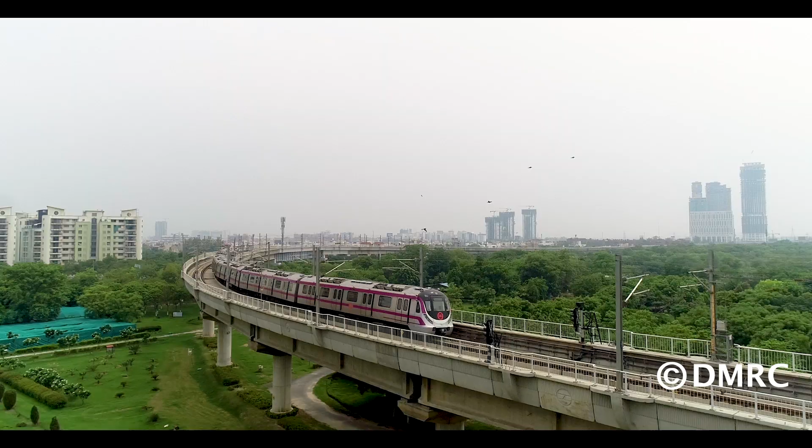Country's capital, nation's pride, its regal past, its cosmopolitan presence, world-class ways, pleasure and comfort, style and elegance. We know, we care. We are Delhi Metro.

Delhi Metro, which commenced operations in 2002, is regarded as one of the most successful urban transport systems in the world. DMRC has gained a reputation as an efficient metro system developer and operator, actively playing the role of consultant for many national and international metro projects.

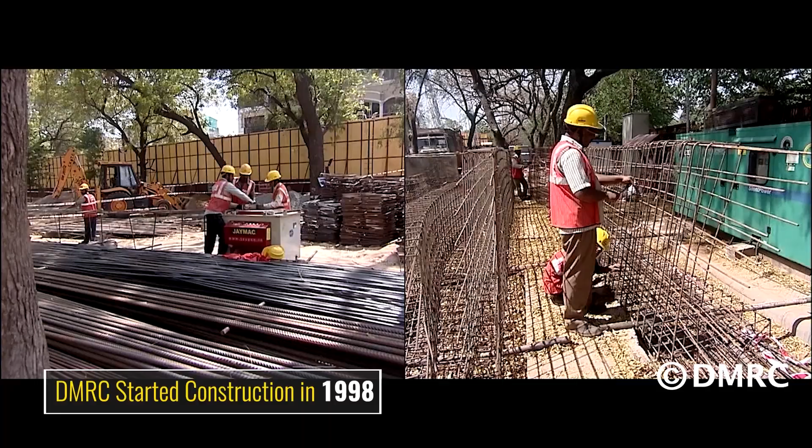Phase 1 and Phase 2 of Delhi Metro laid the foundation of a robust mass rapid transit system in the capital, connecting all four corners of the city and a large part of NCR. The Delhi Metro started construction in 1998, and the first elevated section, with one line running between Shahdara and Tis Hazari on the Red Line, opened in 2002.

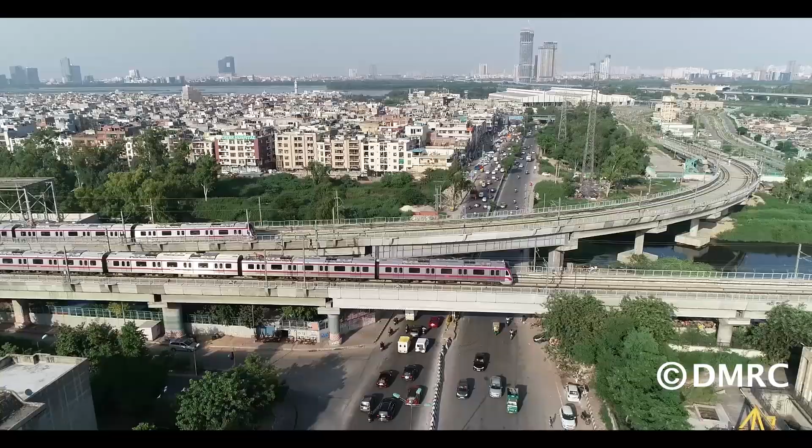Today it stands as the largest metro system in India, operating 12 lines covering 389 kilometers and 285 stations. This is a commendable achievement. Today, Phase 3 expansion has brought the Delhi Metro onto the world map and became an incredible tale of time, one which has been successful in providing quality services.

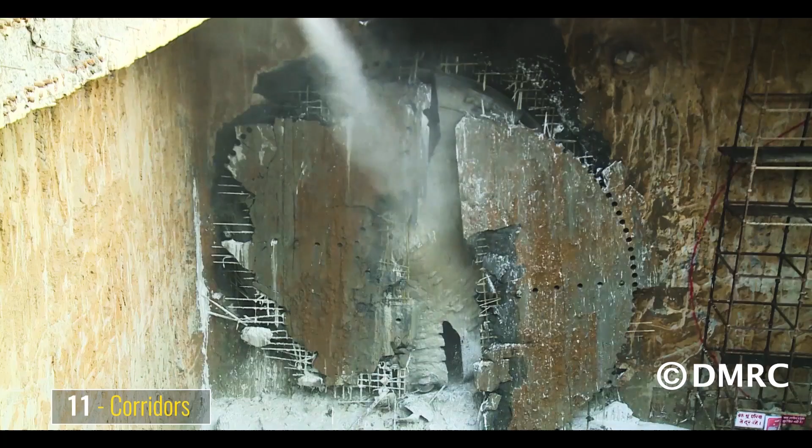Phase 3 connected the linear corridors of the earlier phases and made the metro accessible to most of the major localities of the city and NCR as a whole. It was the toughest phase so far in terms of engineering challenges, involving work on 11 different corridors with 30 mammoth tunnel boring machines and a workforce of nearly 30,000.

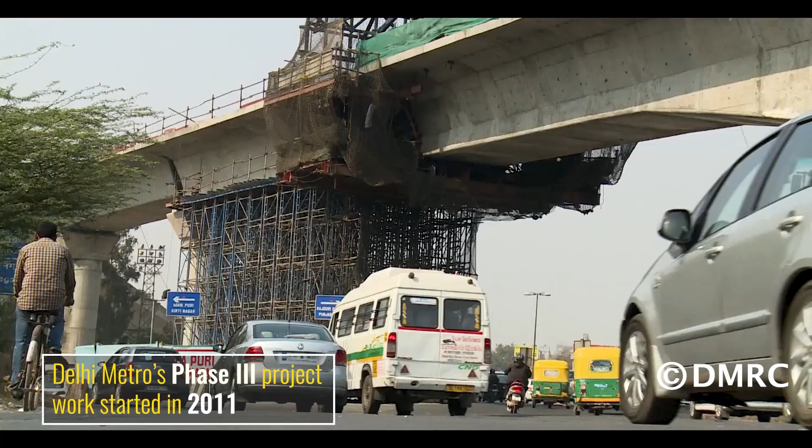Phase 3 was much different than Phase 1 and Phase 2. In terms of volume, the volume of Phase 3 was equal to Phase 1 and Phase 2 put together. Work on Delhi Metro's Phase 3 project started in 2011. It was one of the most challenging infrastructure development projects anywhere in the contemporary world.

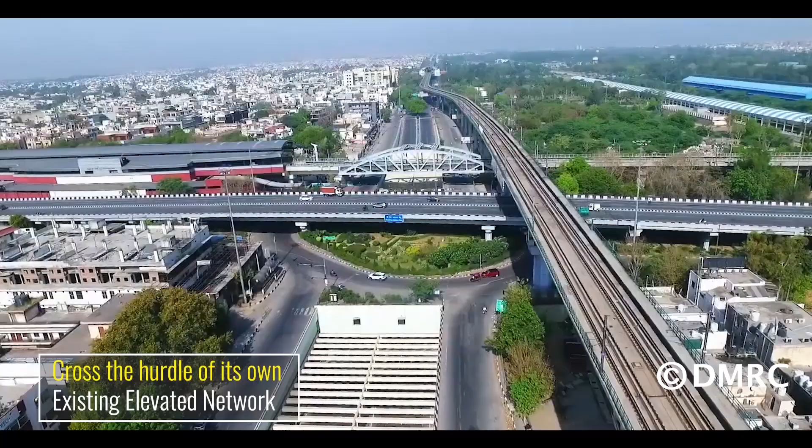For Phase 3, DMRC not only had to dig through rocky terrain, pass through thickly populated areas, and cross over flyovers, underpasses and railway tracks, but also cross the hurdle of its own existing elevated network. Major civil engineering challenges were faced on these three corridors.

The Violet Line, or Heritage Line, corridor of Phase 3 is an extension of Line 6 from Central Secretariat to Kashmiri Gate, with interchange facilities at Mandi House station for Line 3 and Kashmiri Gate station for Line 1 and Line 2. The Central Secretariat-Kashmiri Gate corridor was one of the first corridors of Phase 3, on which work began in May 2011, and it is an underground section.

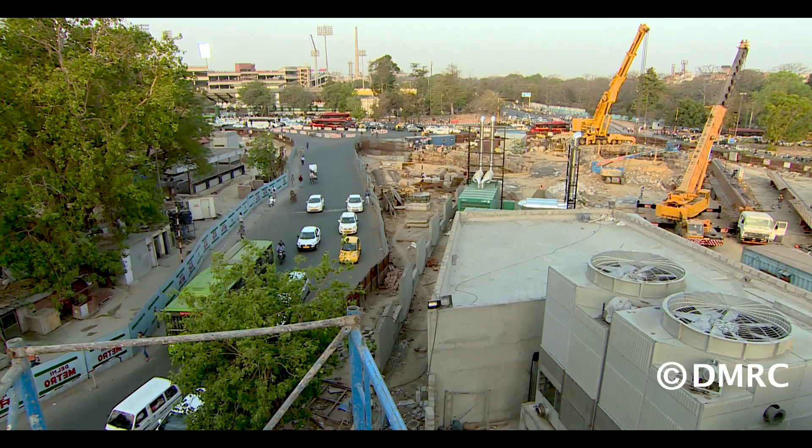As soon as construction work started on the Heritage Line, many complexities surfaced which tested the abilities of engineers. But the DMRC engineers were prepared to tackle them one after another.

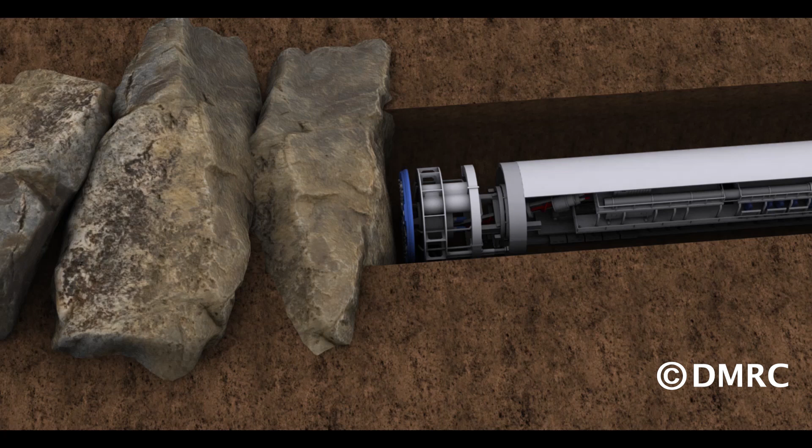The engineers encountered their first challenge on the ITO Delhi Gate section: the presence of the 16th century-old historical monument, Khooni Darwaza, constructed by Sher Shah Suri. The monument was in proximity of the construction area. Here, the TBM on the upline encountered hard rock, and it stopped, as the TBM was originally designed for soft soil.

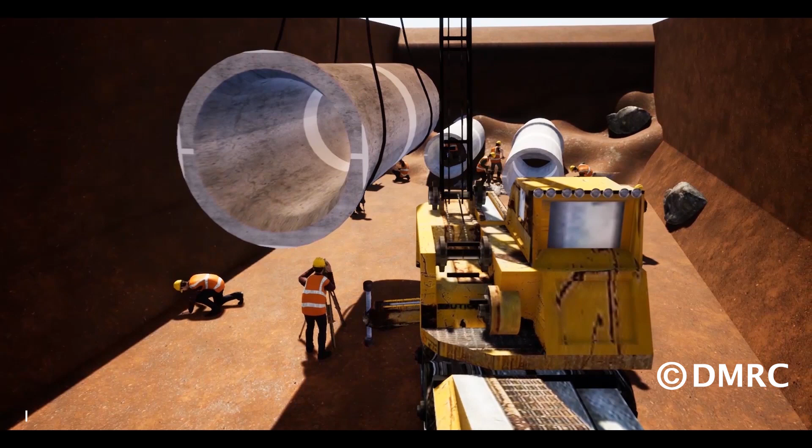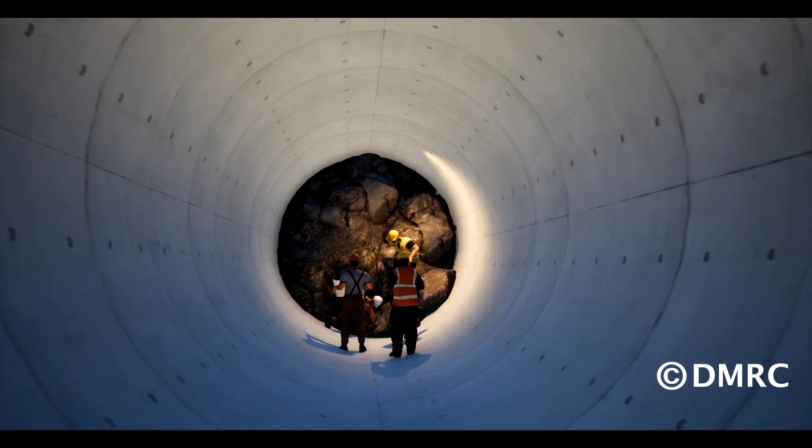DMRC then employed a pipe pushing technique. In this technique, two pipes of 1800 dia each were inserted from the Delhi Gate shaft towards the stuck TBM. A construction worker was sent through these pipes inside the tunnel to break away the rock slowly and make way for the TBM to move forward.

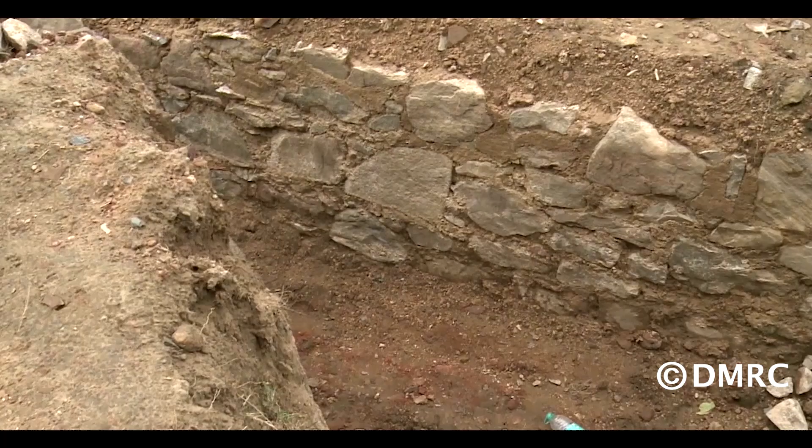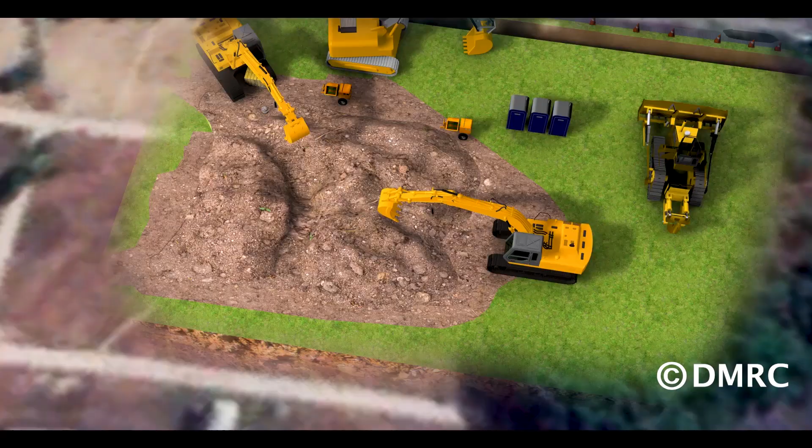Given the challenges it posed to DMRC engineers, the Delhi Gate-Jama Masjid section can be called the stretch of challenges. On the 6th of July 2012, while digging earth in the Netaji Subhash Park area to construct a metro station, DMRC came across remains of some medieval era construction buried under the ground. The discovery triggered excitement among local residents who believed the remains belonged to Akbarabadi Masjid.

DMRC decided to shift its alignment from that area. The Jama Masjid station was shifted 45 meters laterally and 75 meters longitudinally. The tunnel length was also laterally increased by 72 meters on both tunnels.

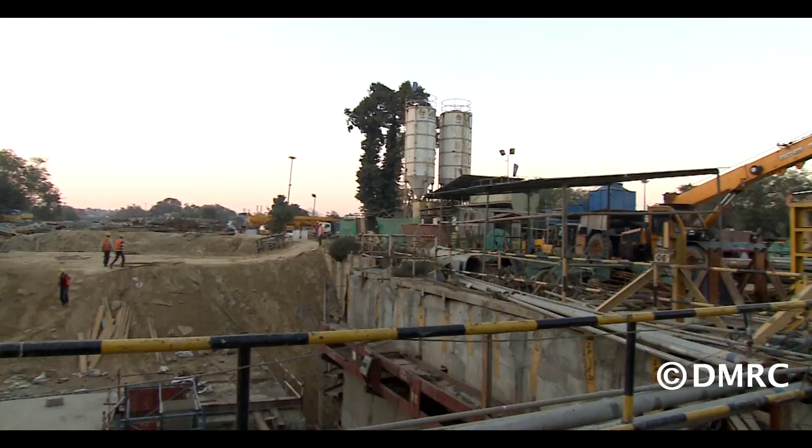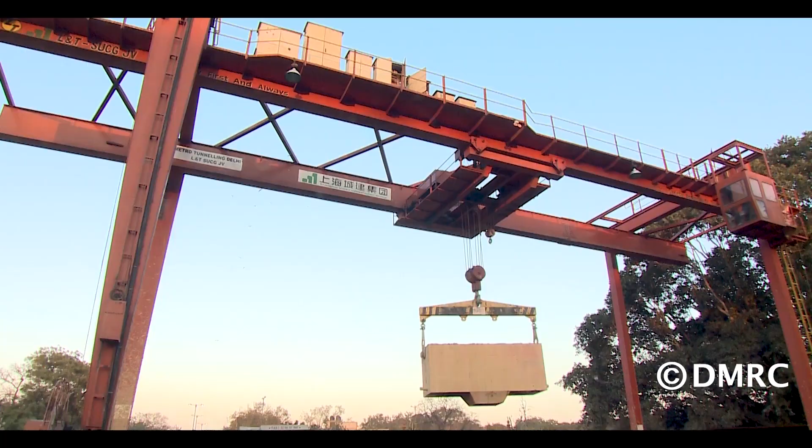Now DMRC had to fight another battle due to the change of alignment, which led to many changes at a very crucial time. The alignment now had to be shifted under the busy Netaji Subhash Marg, and a major portion of the tunnels were to be dug beneath the densely populated residential area of Daryaganj. Shifting the alignment caused numerous unwanted problems, as the earlier alignment was passing under a non-residential stretch of open space.

DMRC engineers did not have access to the ground because the area was densely populated and housed very old buildings and structures, mostly in dilapidated conditions.

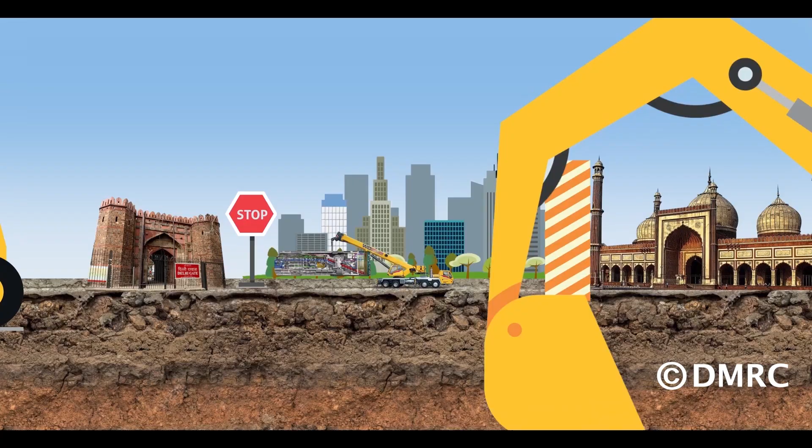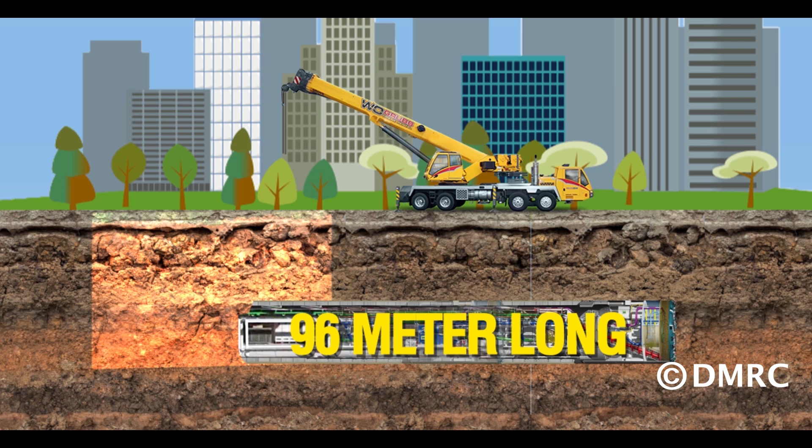In spite of having innumerable challenges, an extraordinary feat was achieved when the complete TBM assembly was done at one go inside the tunnel for the upline. It was a 96 meter long, completely assembled underground tunnel boring machine. This was the longest TBM ever used in a Delhi Metro project, and it weighed approximately 500 tons.

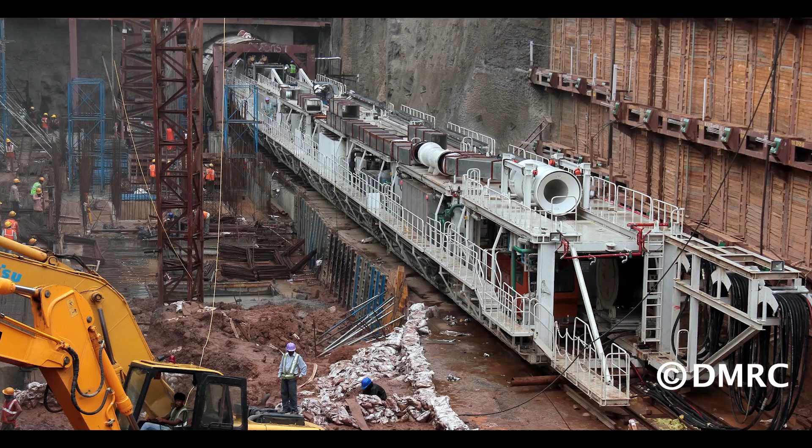The first tunneling obstacle of Phase 3 was also witnessed with this TBM. It initially encountered hard rock, but after 35 rings had been completed, the TBM encountered an old well adjacent to Kasturba Gandhi Hospital in October 2013.

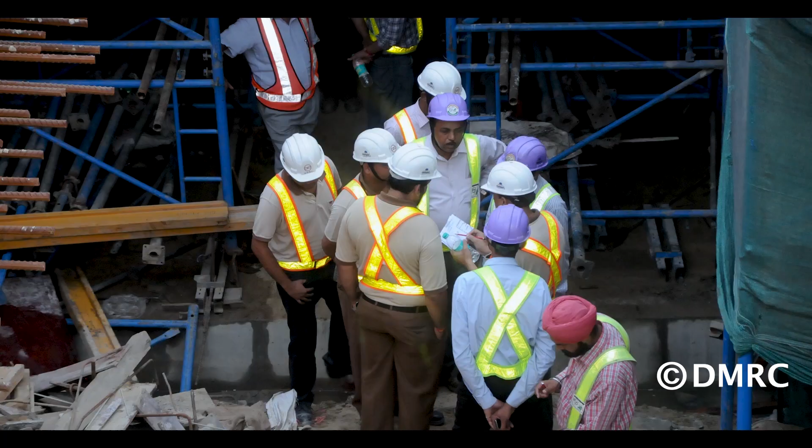This sudden change in ground parameters and settlement values led to a chimney-like formation, resulting in a 172 cubic meter cavity from the ground level. DMRC engineers acted quickly, and this issue was resolved within 24 hours. But after crossing the hospital, the TBM stopped as its bearings failed.

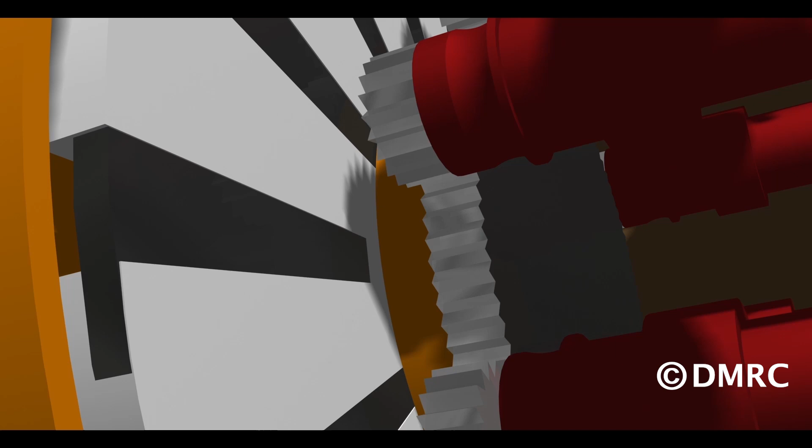Once a TBM gets stuck in such a scenario, it is extremely difficult to move it. The only way to retrieve it is to make a shaft after thoroughly studying the surface.

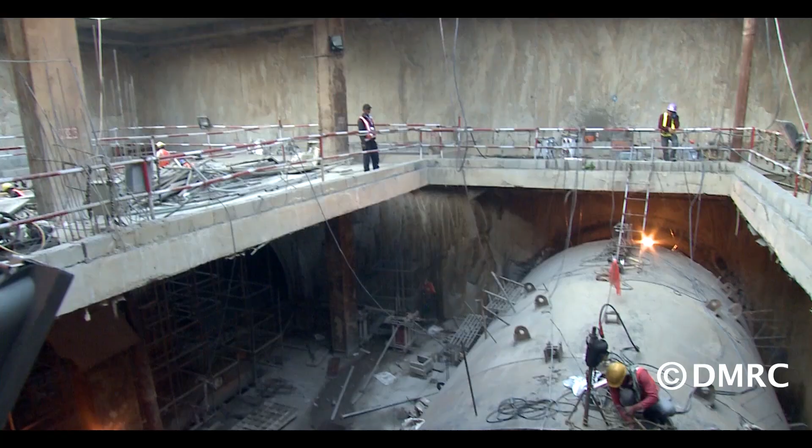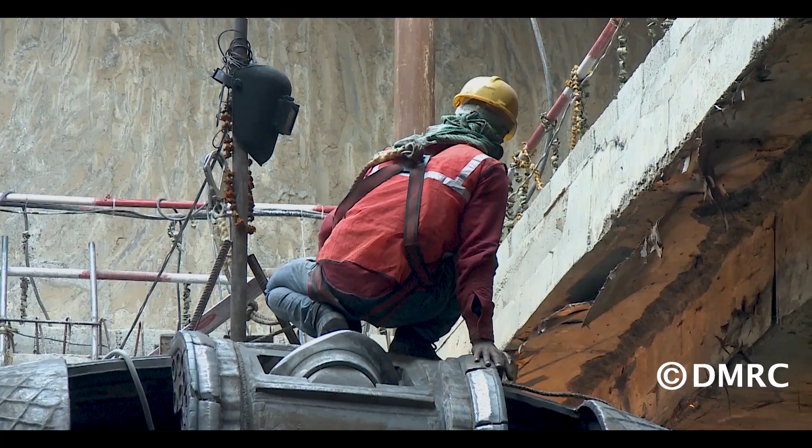During the construction work, every TBM was given a number, and everyone would recognize the TBM by its number only. The TBM-3 remained stuck at this point for almost 2 years, and it could complete around 50% of the tunnel. The cutter head of the TBM was badly damaged due to the rock encountered on the way.

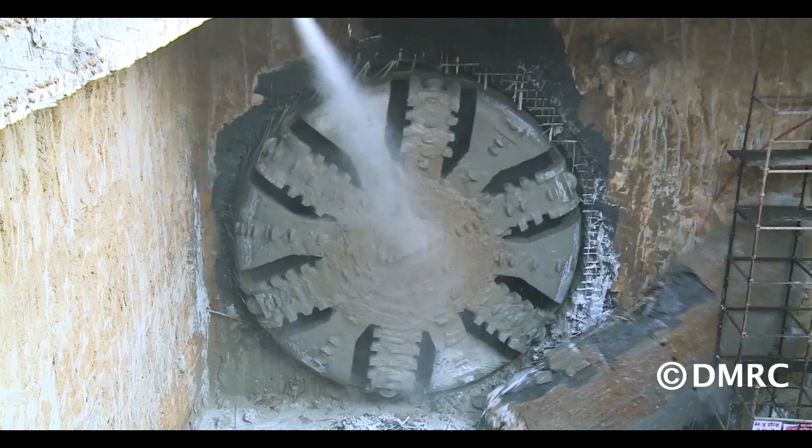Originally, only one TBM was to be used for constructing both the tunnels. But finally, a total of 3 TBMs had to be used to complete the tunneling between Delhi Gate and Jama Masjid. During the construction of the Heritage Line, evacuation of local residents of Daryaganj was a Herculean task.

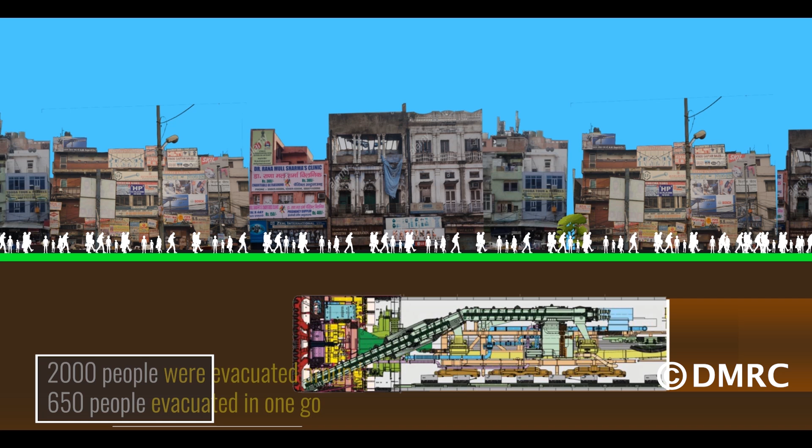The old Daryaganj area houses a number of dilapidated buildings and structures. People had to be evacuated from these buildings in a phased manner as a precautionary measure, twice during the tunneling on both the tunnels. A total of 2,000 people were evacuated, with around 650 people evacuated in one go.

They were accommodated in various guest houses situated in the nearby areas, and DMRC paid for their lodging and food expenses. DMRC also repaired and restored their houses before shifting the residents back.

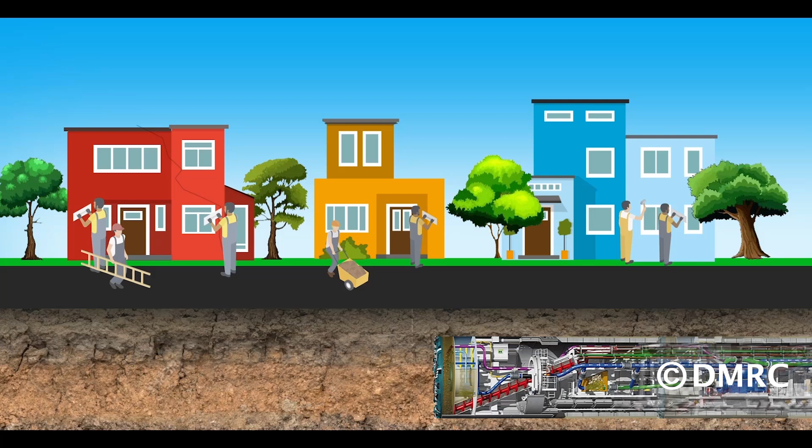The Kashmiri Gate Metro Station, with 3 interchanges, is one of the biggest interchange stations of the Delhi Metro network. The station is the first model of multimodal integration in Delhi. This giant station is very close to ISBT, having interstate and DTC bus stands and metro stations connecting almost every part of the city.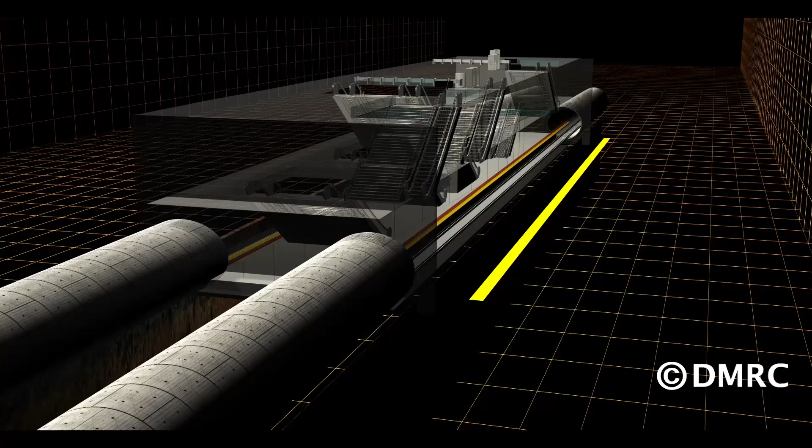The initial plan for the new station was overlapping on the existing station, and it was thus decided to shift the alignment so that the existing station would not be disturbed. The new station had to be curved at the platform level. The radius of the curve is 1000 meters, and due to this, the downline is curved while the upline is straight. Because of the same reason, the platform of the new station is also tapered.

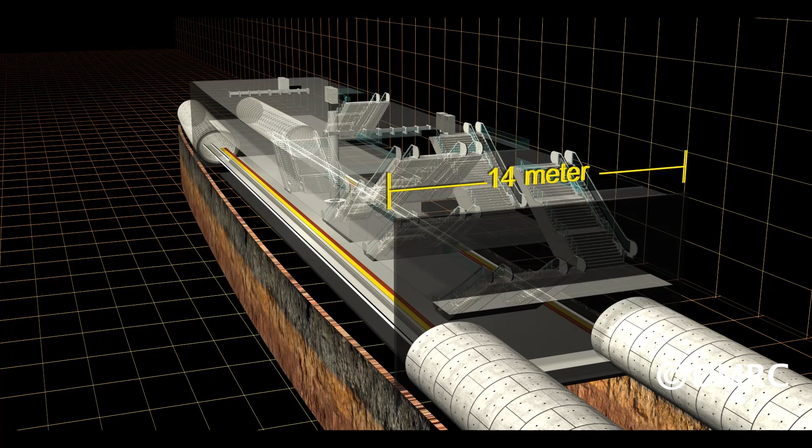The width of the platform at the south end, that is the Lal Killa side, is 14 meters, and it narrows down at the north end to 8.5 meters. Despite having the maximum number of challenges on this smallest stretch of Phase 3, DMRC succeeded and somehow managed to beat the odds, and the ITO Kashmiri Gate Heritage Line was thrown open to public on the 28th of May 2017.

Delhi needs more metro services considering the fact that most of the population rely on metro. The Janakpuri West Botanical Garden Corridor, color-coded magenta, is the Delhi Metro's new corridor along the city's outer ring road. This 38.23 km long corridor is extremely crucial from the point of view of connectivity.

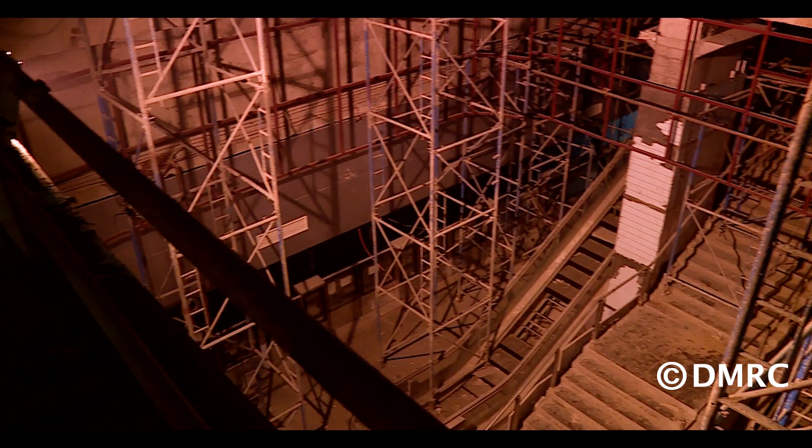DMRC has achieved numerous milestones while constructing its Phase 3 project. During the construction of the Hauz Khas metro station, the Delhi Metro turned one of the major obstructions into an engineering wonder by creating a network of criss-cross underground tunnels, as Hauz Khas was going to have an interchange facility.

The new tunnel had to pass below an already functional metro tunnel, and all this had to be achieved without hampering passenger services even for an hour on the Yellow Line. The Yellow Line station at Hauz Khas is 17 meters deep.

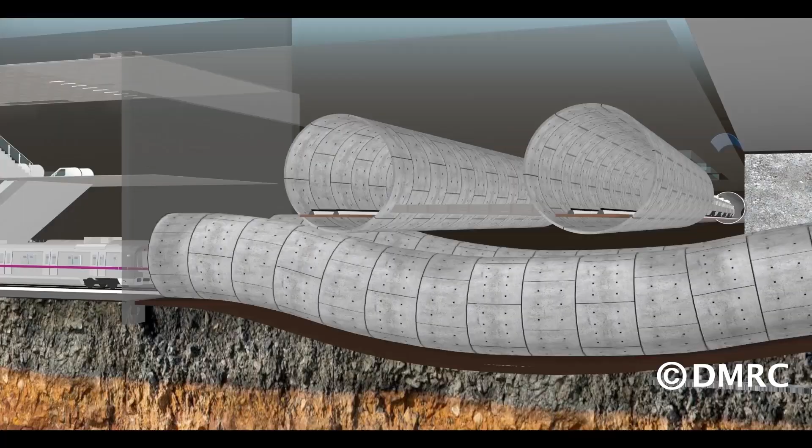For the construction of the new station, it was not possible to go below the existing station, as its foundation is 32 meters deep, and there is the foundation of the flyover on Outer Ring Road as well. So, the new station has been built adjacent to the existing station at a depth of 29 meters with a length of 265 meters. It has been designed as a 4-level station: rail, platform, intermediate, concourse.

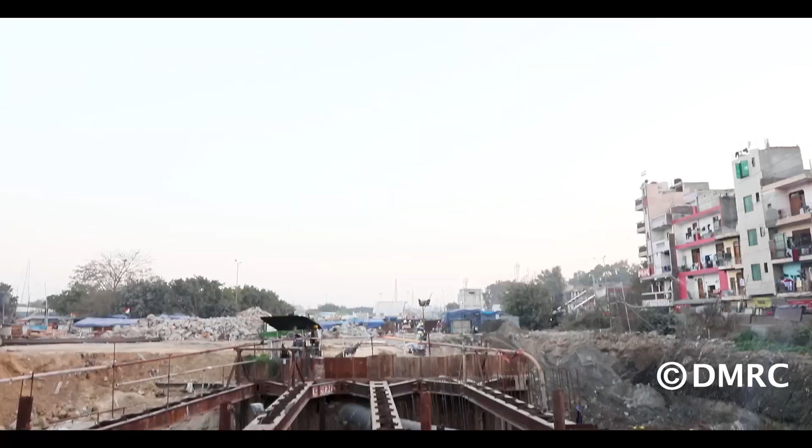Hauz Khas interchange station in many ways reflects the tremendous construction challenges that DMRC's engineers have faced in carrying out the underground construction work of Phase 3. Underground construction is always having its challenges.

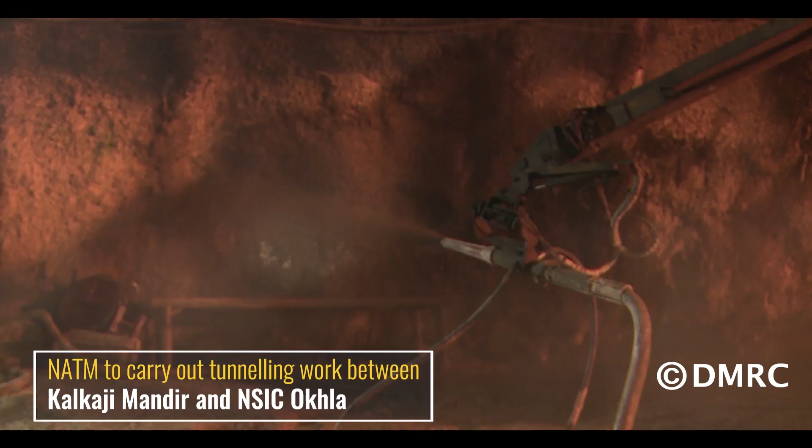DMRC has used the New Austrian Tunnelling Method, NATM, to carry out tunnelling work between Kalkaji Mandir and NSIC Okhla on this corridor to pass below the Nehru Place Kalkaji elevated section of the Violet Line. The tunnel between Kalkaji Mandir and NSIC Okhla passes below piers 135 and 136 of the Violet Line.

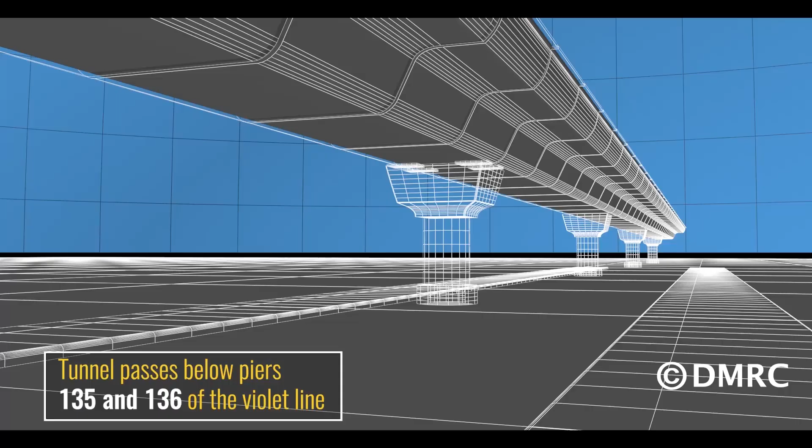It would have been impossible to construct twin tunnels within such a short space. Therefore, a decision was taken to construct a single tube twin tunnel through which both the tracks could pass, using the NATM technology.

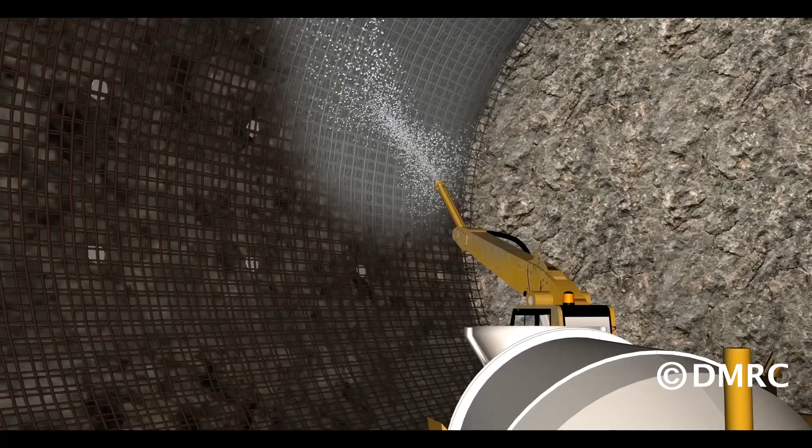NATM technology involves tunneling through mechanical excavation or controlled blasting. In this method, initially the earth is excavated and a primary lining of shotcrete, steel lattice girders, wire mesh and rock bolts are applied for stabilization of soil as per the geological strata.

Delhi Metro's use of the NATM technology at Kalkaji Mandir is a classic example of intelligent tunneling by the Delhi Metro's engineers.

One of the great benefits of Delhi Metro's Phase 3 is that the domestic terminals of the Indira Gandhi Airport are also connected by metro. The Terminal 1 Indira Gandhi International Airport metro station is an underground station which has come up on the Janakpuri West Kalindi Kunj Botanical Garden corridor.

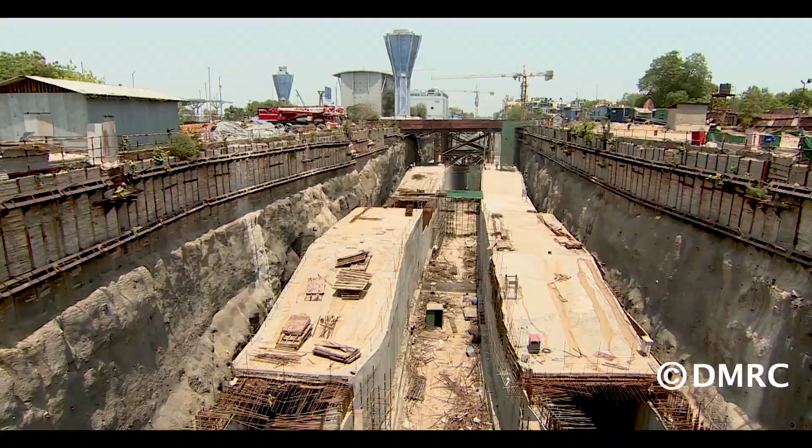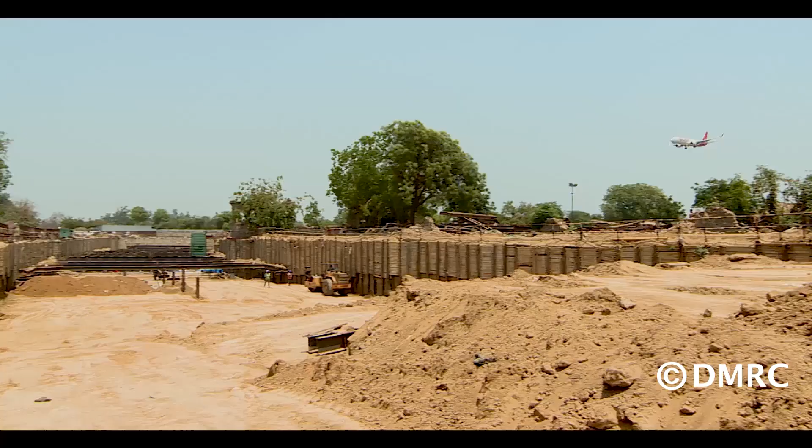DMRC's engineers encountered hard rock during the excavation for this station. However, on one side of the site was the busy Terminal 1 of the IGI airport, and on the other was the congested Mehram Nagar locality, which had a number of buildings in precarious condition. Controlled blasting was carried out at the site, and various monitoring equipment were installed to check the condition of the nearby buildings. The operations or traffic flow at the nearby airport terminal was not allowed to be hampered even for a day.

The Terminal 1 IGI Airport Station also stands out for its engineering achievements. It has a number of landmarks, making it one of the most unique stations of Metro's third phase of expansion. The station box is among the longest with a length of 312.2 meters.

A bridge built on the river Yamuna by DMRC with a span of 574 meters, which connects Delhi with Noida, is one of its kind. During construction work, on many occasions, water was released from the barrage at very short notice, leaving DMRC with very little time to wrap up work there. Within hours, all workers and heavy equipment had to be removed from the site as water would start rising following the release from the barrage. This caused substantial loss of man-hours.

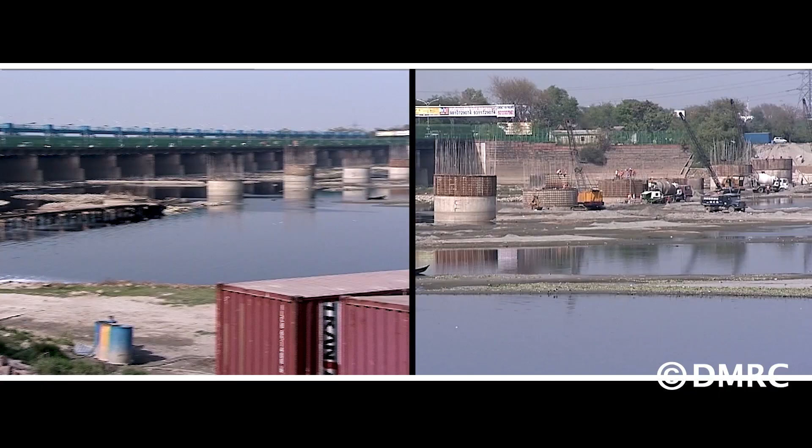During monsoons, due to rising water levels, it was very difficult to carry on with the construction, and substantial work could be done only during the dry months.

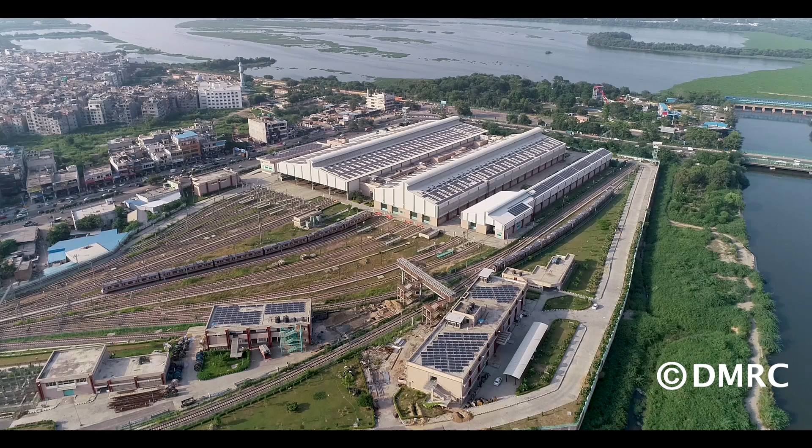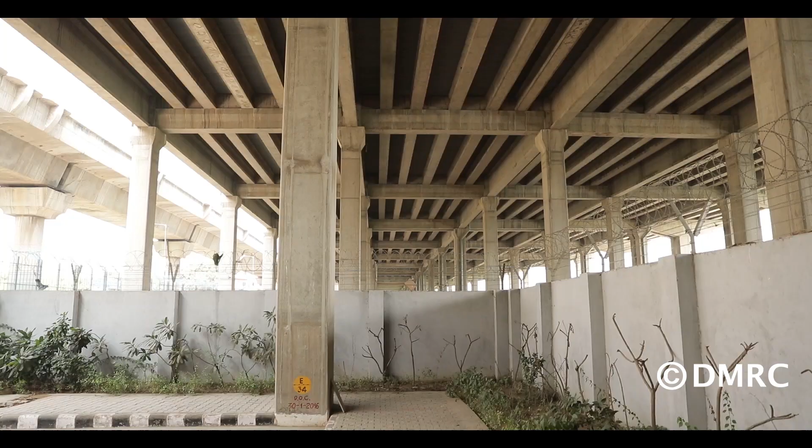For Kalindi Kunj Depot, about 22.5 hectares of land was requisitioned for the construction of the depot, out of which only 50% was available. A 1.3 kilometer long and 30 to 40 meters wide deck for stabling lines has been constructed at Jasola Vihar near Kalindi Kunj on an elevated deck about 13 to 14 meters from the ground, where the trains operating on this section are stabled.

The Pink Line, that is Line 7, was constructed as part of the Delhi Metro Phase 3 network. It consists of 38 metro stations from Majlis Park to Shiv Vihar, out of which 12 stations are underground and 26 stations are elevated. The Pink Line, with a length of 59 kilometers, is the longest individual line in Delhi Metro.

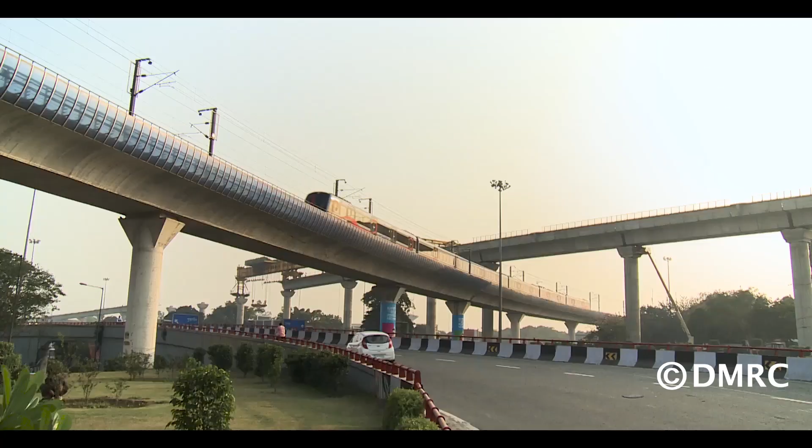DMRC reached its highest point so far at 23.6 meters. It crosses over the existing alignment of the Airport Express line at Dhaula Kuan. The design team of DMRC also prepared the design of the viaduct after closely studying the requirement of passing over several major landmarks such as the Airport Line Viaduct and the flyover at such a height.

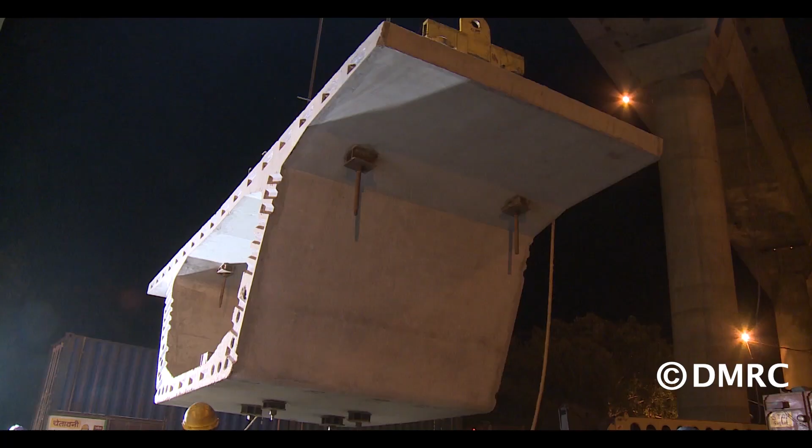Due to the proximity with the existing flyover and the Airport Line Viaduct, and as the segments were to be lifted to a height of about 23 meters, a systematic methodology was planned for the erection of the segments. The segments were erected through a special 4-step method because of the extra height involved.

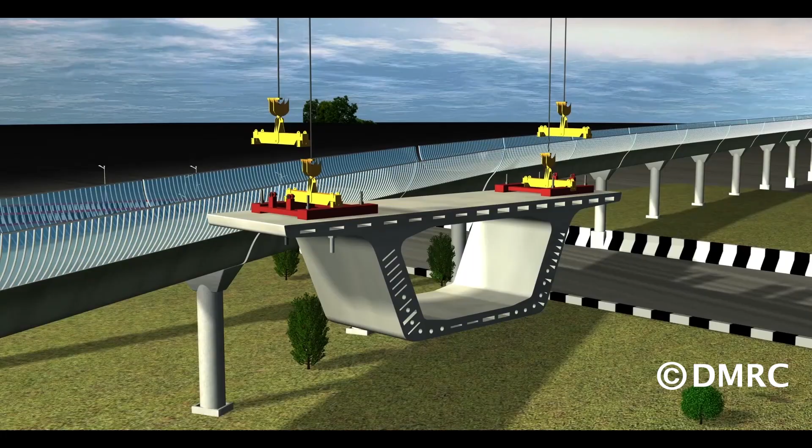Step 1: The trailer brought the segment and was parked between the already constructed piers. Step 2: The segment was lifted by an extended winch assembly having a load carrying capacity of 120 tons. Then the segment was transferred to a normal winch assembly and the extended Macalloy bar was removed and again lifted to a height so that it could be transferred to the Macalloy bars fixed to the slider.

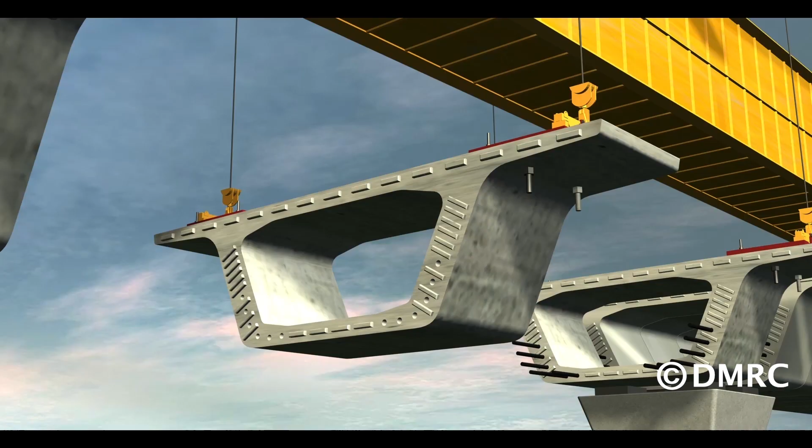Step 3: The segment was rotated and attached with a segment trolley or slider. Step 4: The segment trolley or slider was pushed to one end of the pier, where it was erected through a segment launcher.

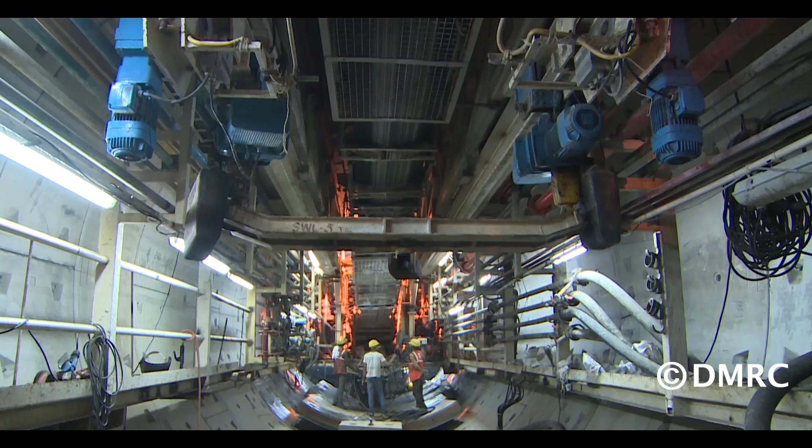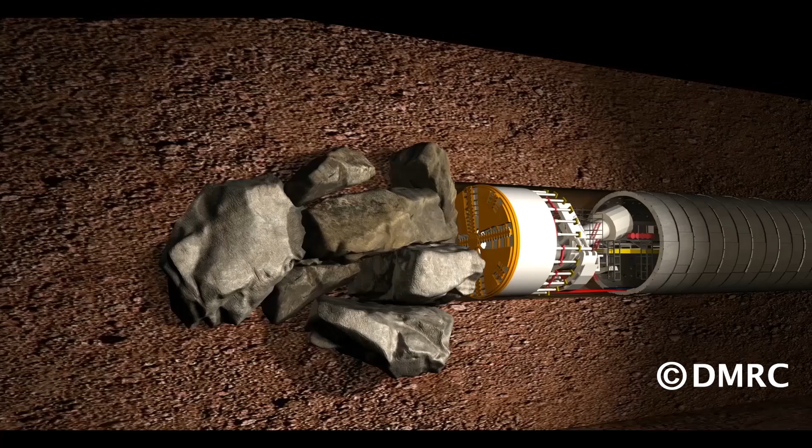Majlis Park is the first station of the Pink Corridor. The tunnelling between Majlis Park and Azadpur was quite challenging. After completing 580 rings from Azadpur towards the Majlis Park ramp, at a depth of 21 meters at their low point, tunnel boring machines or TBMs engaged to make the 1.4 kilometer long tunnel encountered unexpected ground conditions while tunnelling in this stretch. The unexpected ground conditions damaged the cutter heads of both the TBMs.

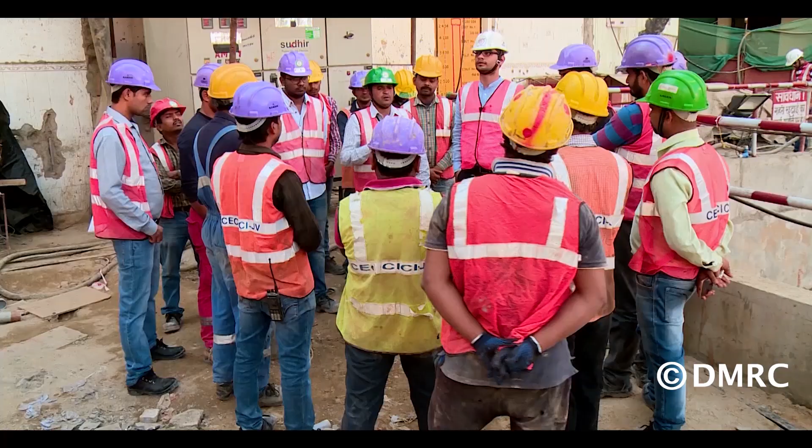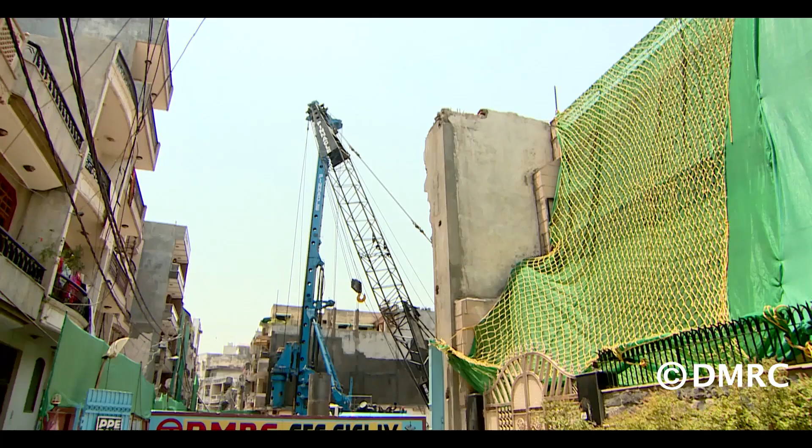Thus, an emergency shaft had to be made midway to retrieve the TBMs in the densely populated colony of North Delhi. Land on the surface to build the shaft was not available, as this area had a number of private residents and a Gurudwara. Under these circumstances, DMRC took a decision to retrieve the TBMs instead of changing the cutter heads, and for this purpose, 2 houses of 110 square meter area each and another structure of 400 square meters were taken to make the retrieval shaft.

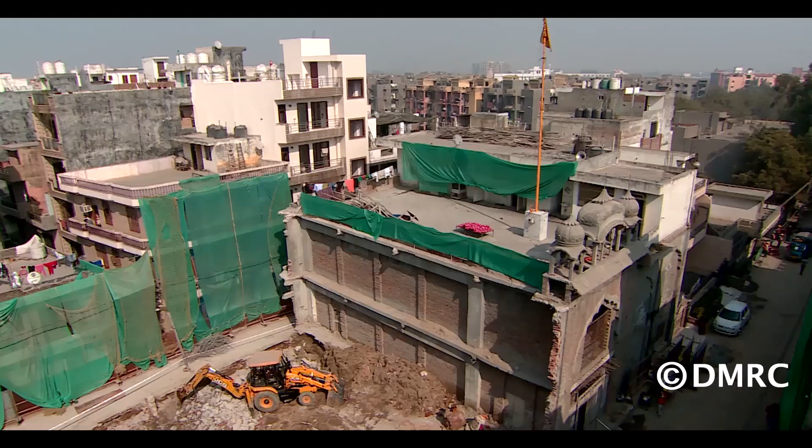Once the residents were relocated to an alternate location and the land was acquired from the concerned owners, the demolition work began. The rescue shaft was designed. During the boring of piles, surrounding buildings were closely monitored by soil settlement markers.

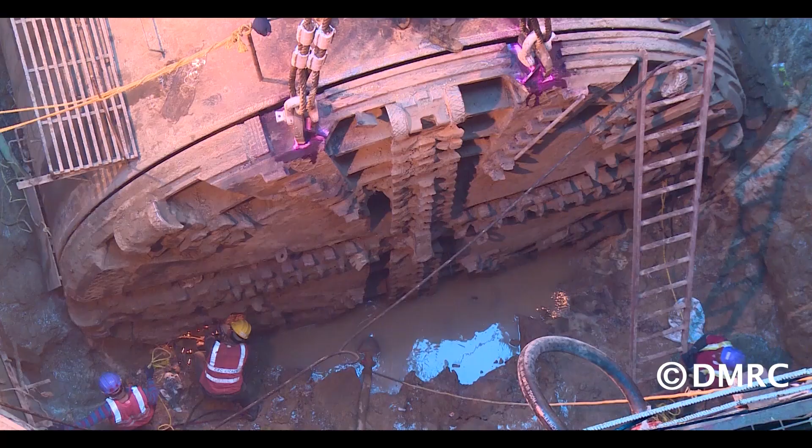Meanwhile, 2 rock TBMs were started from the Majlis Park side towards Azadpur, so that the tunnelling process could be completed in this section. After completing the tunnelling process, these TBMs were also retrieved from the same shaft at Rameshwar Nagar.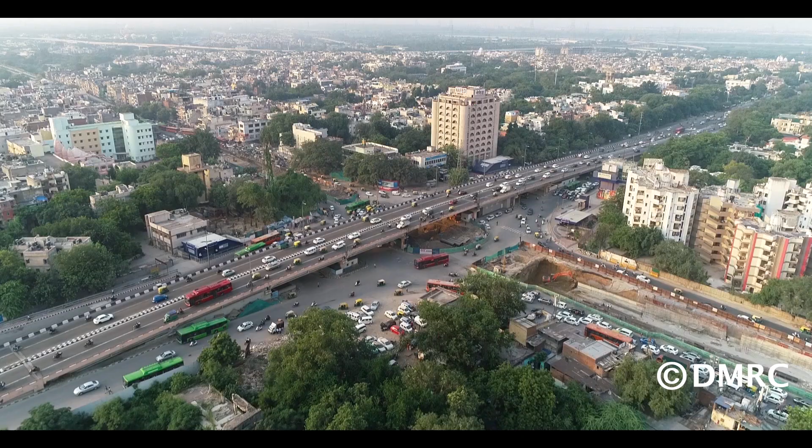Ashram station is one of the smallest metro stations in the world. Located at the center of one of the busiest intersections in the city, DMRC had to fight several land acquisition battles. The long-lasting legal battle forced designers to come up with a station design that took just 151.6 meters of space against the average of 265 meters. Since private land could not be acquired, DMRC had to reduce the station space by almost half the average size.

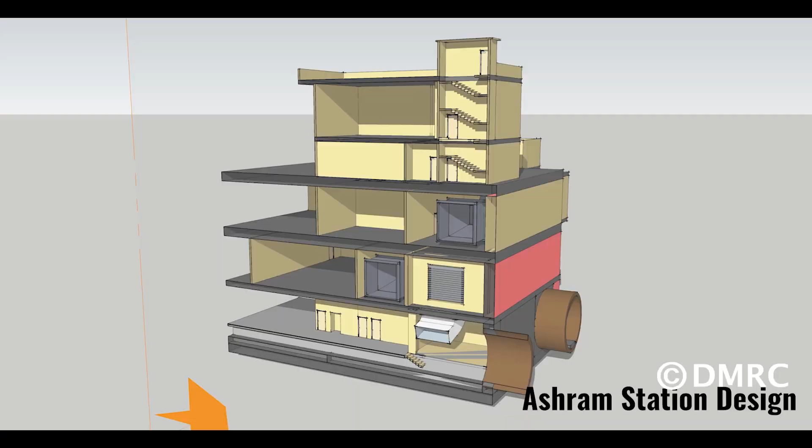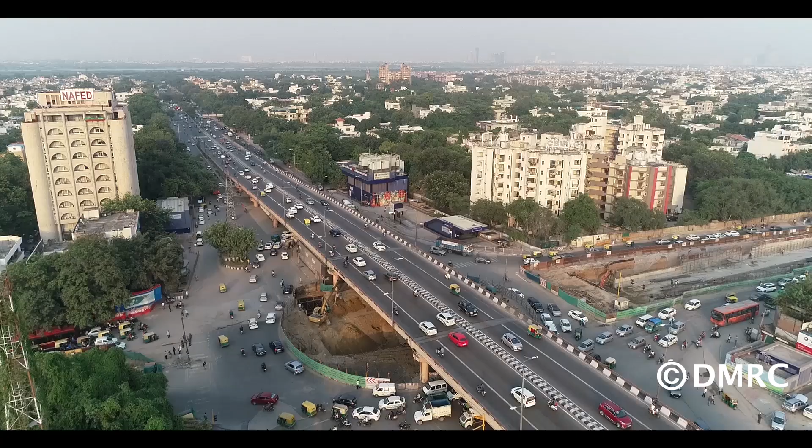DMRC architects and engineers, for the first time, completely redesigned the underground station, utilizing all three levels - the mezzanine, concourse and platform. This was done by reducing the length of the platform and shifting ancillary buildings and ventilation fan rooms vertically upwards.

The Line 7 of Delhi Metro has faced the maximum number of engineering challenges since it passed through a lot of difficult stretches and densely populated areas. One such section was where the viaduct had to cross the Anand Vihar railway station of the Indian Railways. For crossing this area, 6 piers were erected in the railway compound in such a way that there was no infringement of the metro line with the railways. One of the spans, designed between pier number 235 and 236, is almost 70 meters long. In order to cater to the requirement of special spans, balanced cantilever construction has been done with the help of form travellers.

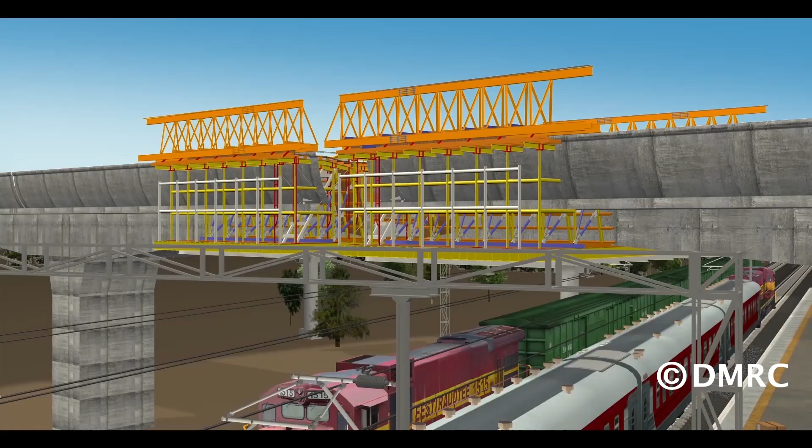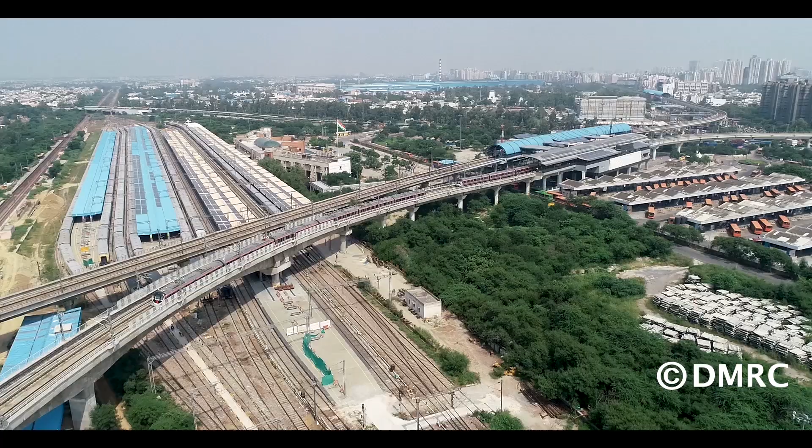DMRC has crossed the railway lines in a very safe and systematic manner, with all safety precautions in place and without affecting the daily train movement on the section, in coordination with the Indian Railways.

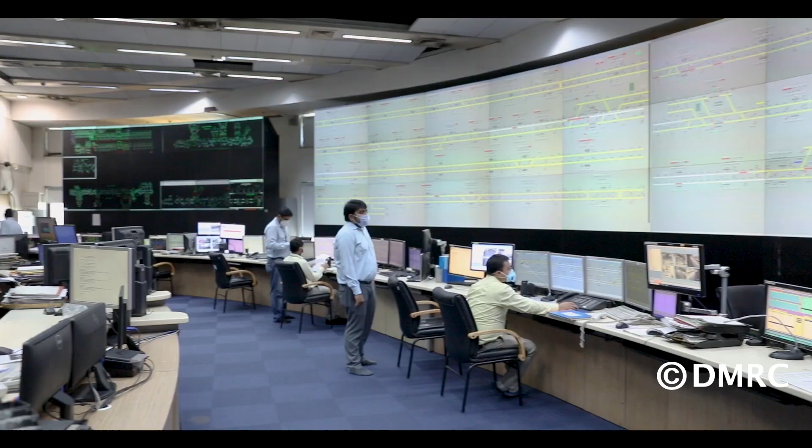The new signalling technology known as Communication-Based Train Control or CBTC has been implemented on this corridor after undergoing rigorous testing in stages. By means of the CBTC systems, the exact position of a train is known more accurately than with traditional signalling systems, resulting in a more efficient and safe way to manage railway traffic.

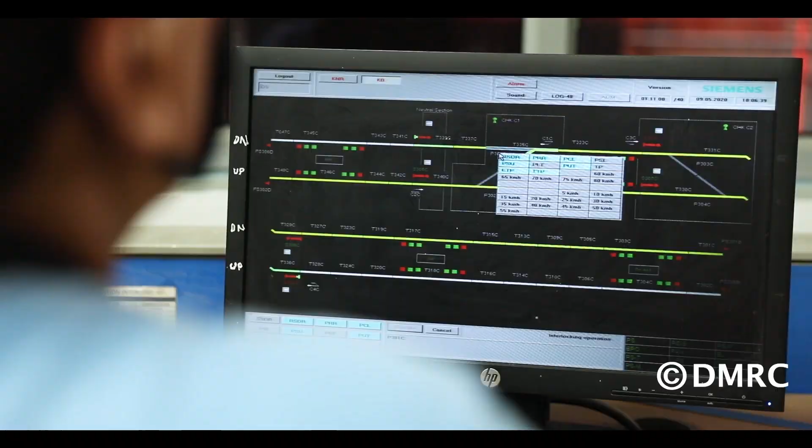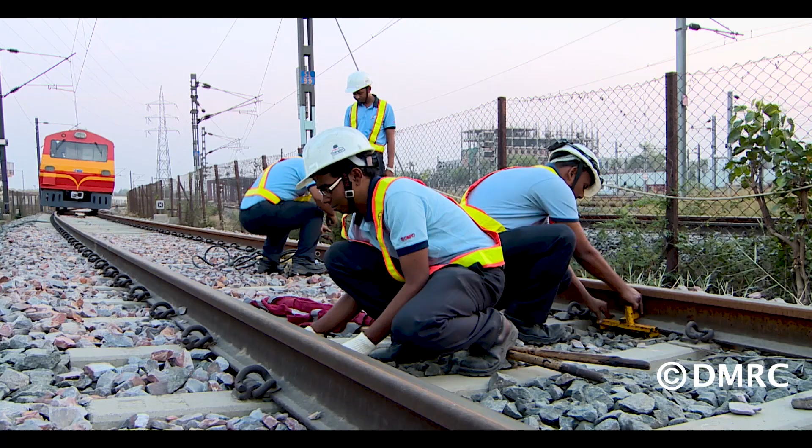Keeping the Delhi Metro running all day long without a glitch requires not only regular maintenance of trains and tracks, but also constant monitoring of the system during operational hours. The response of the train at different speeds, braking, and the interconnection with the Operations Control Center was also monitored during the trials. The behavior of the track system and the overhead electrification or OHE was checked repeatedly. This has paid dividends, and the reliability of OHE has improved to a considerable extent.

Delhi Metro's new UTO, or unattended train operation enabled trains, are now operating. The system has significantly increased the level of punctuality and higher operational flexibility.

The Delhi Metro network successfully connected the far-flung areas of the National Capital Region in Phase 3, making travelling much easier for passengers. Today, Delhi Metro stretches to Noida and Ghaziabad in the state of Uttar Pradesh, and Gurugram, Faridabad, Bahadurgarh and Ballabgarh in the state of Haryana.

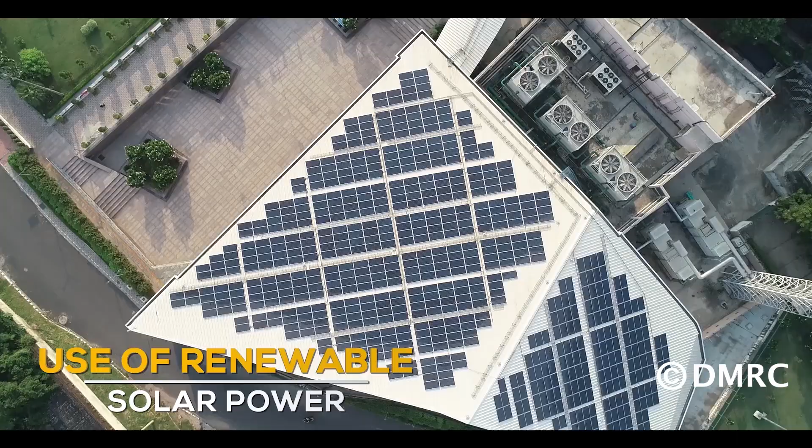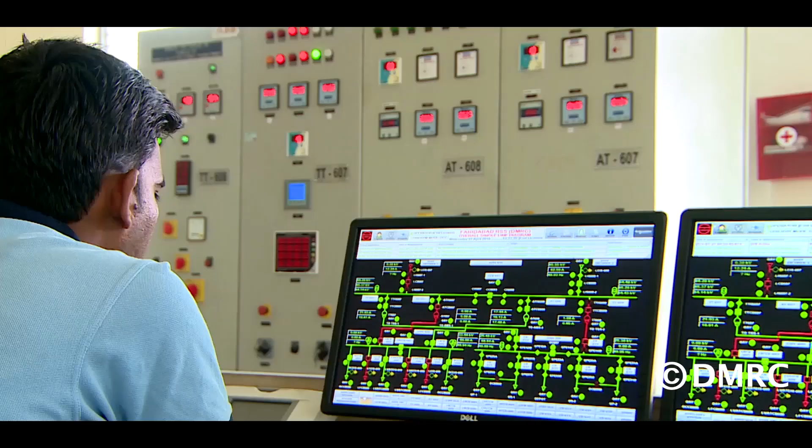In order to mitigate carbon footprints, DMRC is trying to maximize the use of renewable energy by utilizing all possible rooftops for harnessing solar energy. Till date, 32.4 megawatt capacity from rooftop solar have been commissioned in DMRC under the RESCO model.

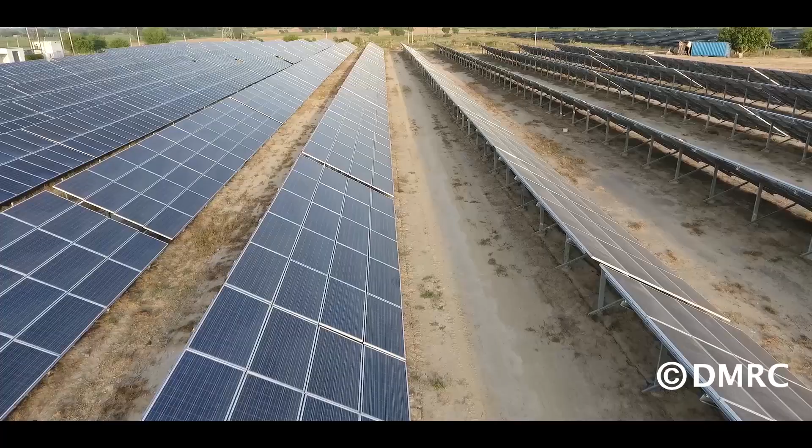After utilization of all available rooftop space, DMRC decided to procure solar power from the off-site Rewa Ultra Mega Solar Power Plant for other operational requirements. DMRC has been involved in this project from concept to commissioning stage, and the actual flow of energy to DMRC started on 18th of April 2019 through interstate open access.

DMRC is working towards promoting the rich heritage, art and culture of India through artworks, display panels and exhibits at its stations. DMRC has tied up with various government bodies, organizations and schools, authorizing them to use the metro premises in such a way that they are treated as a hub for promotion of Indian art, culture, literature, craft, tourism, etc.

Delhi Metro's Phase 3 stations have been utilized for the portrayal of the history and heritage of the country. Various artists, including professional and amateur, were used to create these artworks, and different artwork was displayed at each station, which also helped to enhance the beauty of these stations.

DMRC has got a very unique type of experience where DMRC develops the system, then operates it, uses this experience in further development, and then in succession improvement from phase 1 to phase 2 and then phase 3, and now in phase 4. This type of experience, I think, nobody in the world has got.